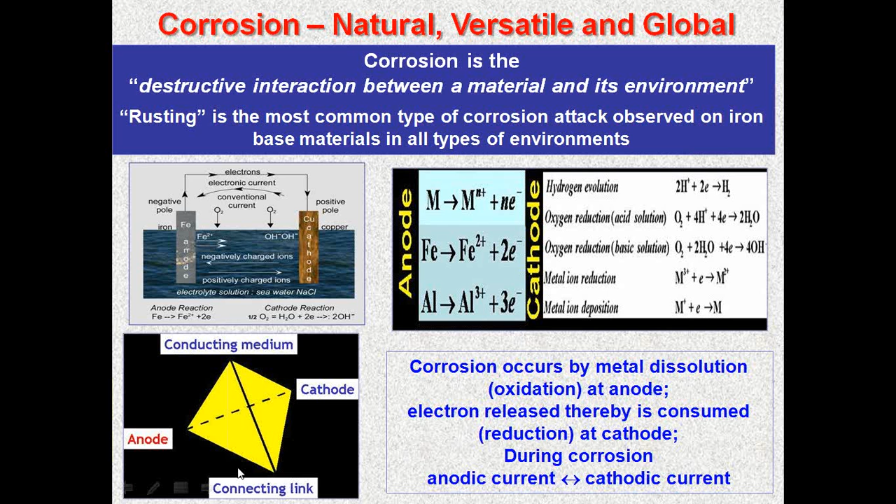The metals are produced from the ores available on Mother Earth. It's not that easy - we get the ore, mine them, extract them, melt them, and mix some metals together to make alloys, either as a metal or as an alloy. These are all made into engineering components by working with them, machining them, and welding them, making different types of components - tanks, pipes, flanges, so many things.

But during operation and service, corrosion is one of the damaging mechanisms, like fracture, fatigue, scaling. It makes the component reach its end of life, and it becomes waste. The economy is lost from where the ore started - the metal goes back into ore when it becomes waste. The energy we put in to extract the metal from the ore, make an alloy, make a component, and operate it is lost. The economics is lost, and we also generate wastage.

This is the natural corrosion cycle of material, because all metals are extracted from the ore, which is a natural stable compound. Take iron - the ore of iron is hematite and magnetite, nothing but iron oxides. From iron oxide, they practically take the iron out, somehow killing the oxygen. So the iron metal is always hungry for oxygen to again form the ore, that is iron oxide. It's a natural phenomenon - corrosion cannot be avoided in service.

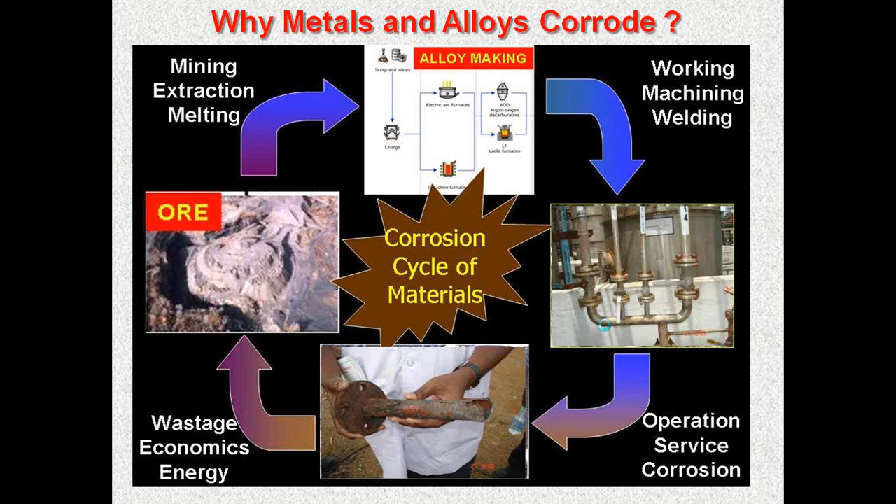Now our strategy is how to avoid this corrosion, or how to delay this corrosion, or how we can try to slowly stop the corrosion from happening, so that I have a lot of service life for the component in service. In this way, I am going to speak now the entire lecture about a class of material, stainless steels.

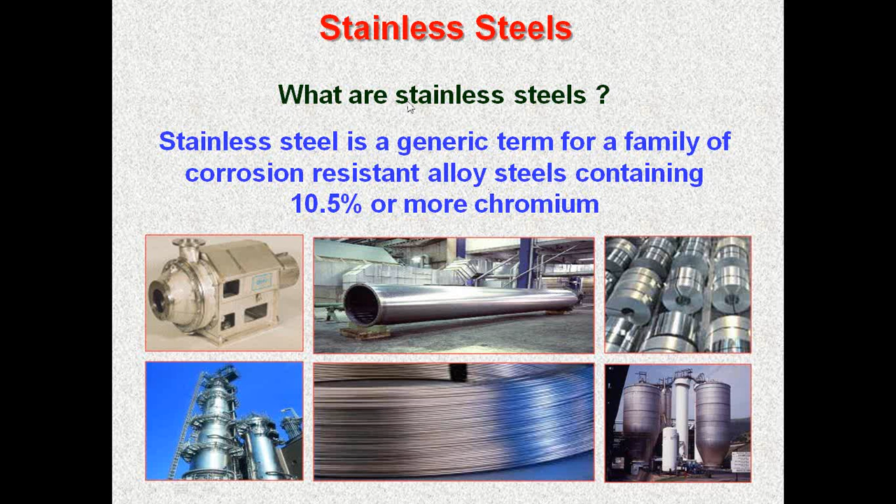What are stainless steels? A wonderful material having unique properties which made them used in various industries for corrosion resistant applications. They are basically a generic term for a family of corrosion resistant alloy steels containing 10.5% or more chromium. They are made as pumps, pipes, sheets, towers, wires, tanks - so many components are made using this family of alloy steels called stainless steels.

Who invented stainless steel? History says that Harry Brearley, a British metallurgist working at British Steel, around 1911 found that chromium above 10% can prevent the erosion and fouling of rifle barrels, which were used frequently in the war and had a problem of corrosion and fouling, erosion and fouling. This story just started between 1911 and 1913.

Not only this British metallurgist - there were also other scientists and engineers from other countries who similarly found that chromium, when added beyond some level, provides a kind of non-rusting behavior. That is how today we are celebrating 100 years of stainless steel. There are more than 150 types of stainless steel, with over 120 types used in the industry, and this year, 2011-12, we are celebrating 100 years of stainless steels.

However, the word 'stainless' was coined first by Ernest Stuart, a manager at a cutlery company, who first described stainless cutlery knives. This person, the manager of the cutlery company, was probably involved in supplying cutlery articles like knives and spoons, which were getting stained after being used for food. But probably he found one type of steel made with a little more chromium that was not having any stain formation, so he coined the word 'stainless.' That is how the stainless steel started.

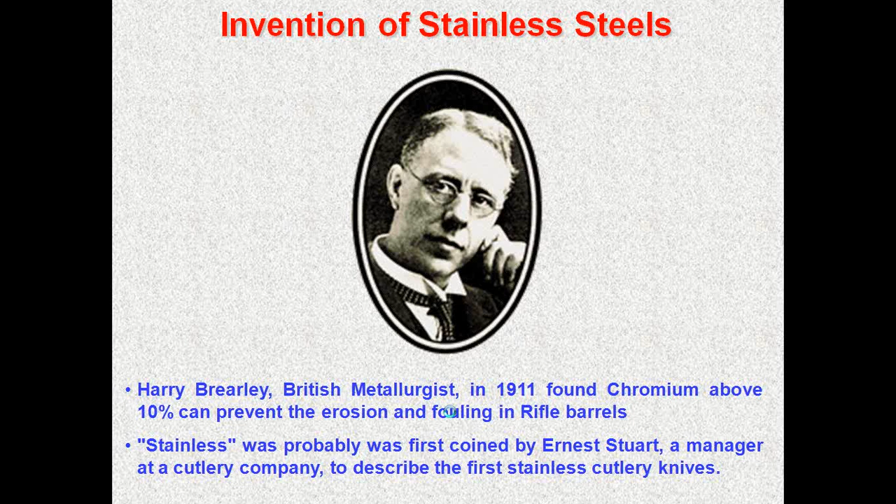If you want more details, let's look at the ferrous group of alloys - the iron alloys, alloy steels, and stainless steel. All of us know the family of steel, that's iron-carbon alloy, as carbon steels, alloy steels, and stainless steels. If you look at the iron alloys, from the meteorite or prehistoric iron to the Delhi iron pillar, which has stood erect for 1,600 years without much corrosion at Delhi, and then various other iron-carbon, phosphorus, sulfur, manganese alloys, then the iron-carbon steels.

From here, the situation improved to alloy steels, where people started adding chromium, tungsten, and were manipulating the chromium content to form an alloy steel with better properties than iron alloys. Very surprisingly, Michael Faraday also added chromium and found there were no corrosion issues, but he did not make it public; he also studied iron chromium alloys in his investigations.

Later you come to the stainless steel group. You can see Haynes, then Maurer and Strauss, Harry Brearley, Stuart, Borchers and Thomas, Guillet, and Goldschmidt. Many people started using various combinations of nickel and chromium, and they found that a minimum percentage of chromium, about 10.5%, is required to have this stainless property.

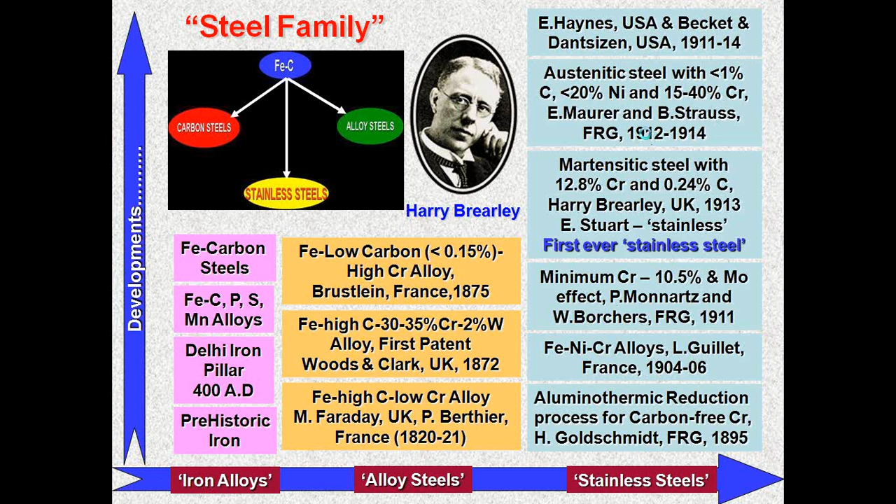This is the early development of stainless steel, but if you look at today, 2000s, from 1911, a lot of developments have happened. Today we have mastered the technology of stainless steel, producing from normal conventional stainless steel to highly alloyed, highly clean steels with tailored properties for various applications.

You can see nickel austenite structure, low carbon ferritic structure, duplex stainless steels, and more understanding of physical metallurgy, welding and other technologies. Then they found the problem of sensitization and intergranular corrosion. With respect to manufacturing technology, there's the AOD process, cleaner lower carbon and nitrogen containing steels, submerged arc welding, continuous casting, vacuum induction melting, electroslag remelting. Then also new varieties like superaustenitic stainless steel, high nitrogen stainless steels, life cycle costing, and highly alloyed stainless steels.

Today you have a lot of nanotechnology based developments, intelligent welding, pattern rolling, tailoring the surface. Many developments are happening. Stainless steel is growing and growing. We have more than 150 types of stainless steels in different classifications.

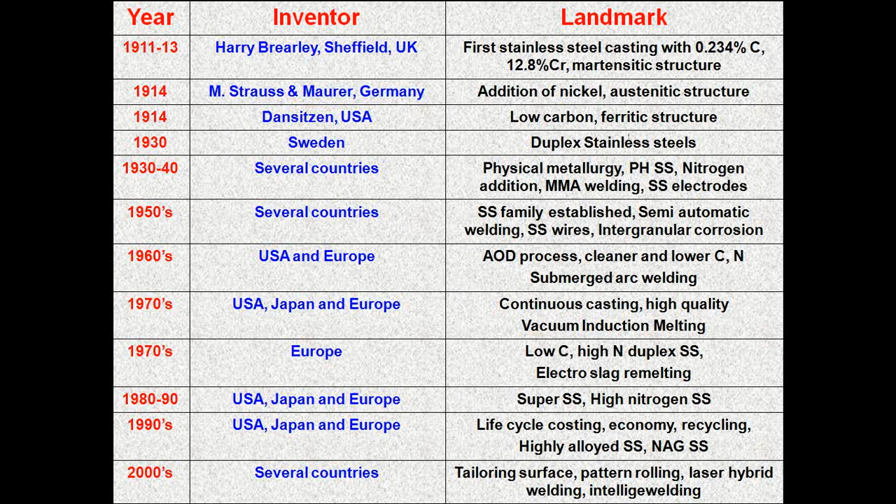A simple and fundamental question everybody has in mind is, why are stainless steels stainless? If you look at it, the formation of a non-rusting thin surface layer providing a stainless nature is the important concept giving stainless steel its stainless property. This passive film layer is made of chromium oxide, Cr2O3, and it forms when the chromium content is greater than 10.5% in the steel. This protectiveness, the stability of the passive film, can be enhanced by adding higher chromium content and also by addition of molybdenum, nickel and nitrogen.

What are the benefits from stainless steels? Corrosion resistance, high temperature properties, low temperature properties, hygiene and aesthetic appearance, ease of fabrication, toughness and impact resistance, and cost and life cycle cost. These are some of the best benefits that one can get from stainless steels.

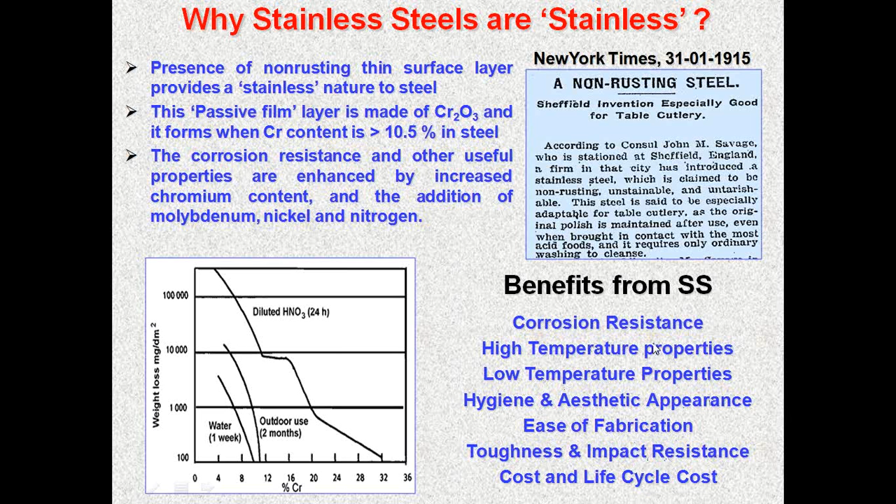This is a very important point. I feel this is one material where life cycle costing is very important. If you look at the life cycle of stainless steels, from the melt you can fabricate various components and use them in industry for various applications. Ultimately it doesn't just rust and get thrown away; it becomes scrap, and the scrap can be remelted. So by secondary melting and improving the quality, you can again use these stainless steels for further applications. It's as good as saying no scrap, 100% recyclable. That's the most important economical point.

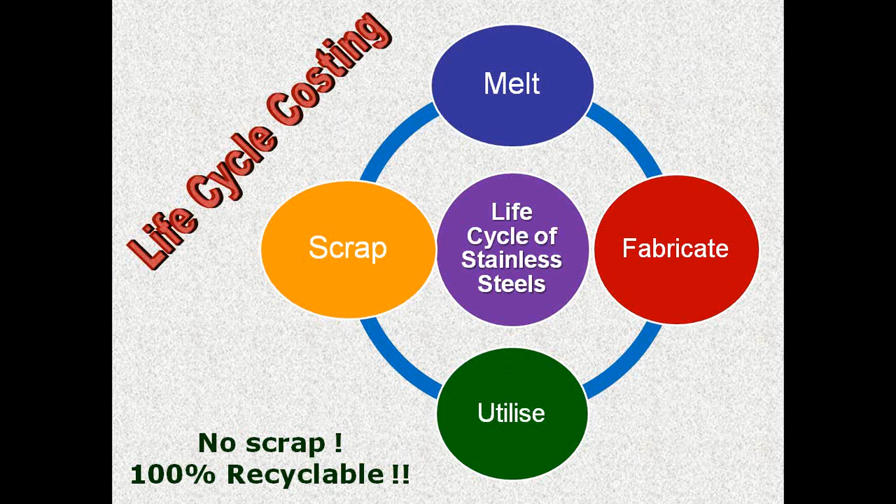How are they manufactured? Three simple steps. The first step is they are melted in an electric arc furnace. After fixing the charge, the amount of chromium, nickel, carbon and iron, it is melted in an electric arc furnace. You can also use scrap stainless steel directly as a starting material. The melting occurs around 1500 degrees, close to the melting point.

Then in step 2, this is transferred to a converter where the argon oxygen decarburization process is used to decrease the carbon by blowing out with oxygen, and then alloying elements are adjusted in order to match the composition. Then in the third step, the molten mass is poured into a mold, and then you make a billet or whatever cast structure or rod structure you want.

And also you can do a continuous casting by rolling them up to 2 meters wide and up to 300 millimeters thick. Then there's a suitable size for hot rolling, and this can be done after slab grinding.

This is a very simple step. Step 1, make the primary melt. Step 2, this should again be treated with an argon oxygen decarburization process to adjust carbon and other alloying elements. The third step is making it into a wrought product.

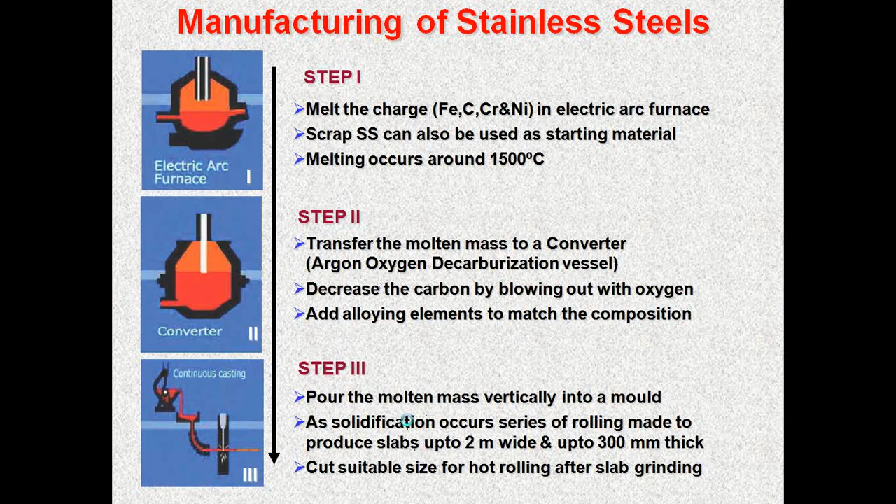Now this is a typical flow sheet that is followed in an industry like Jindal Stainless. They are the pioneers in stainless steel manufacturing in our country, where from the raw material stage, they go into arc melting, then the VOD converter, if the alloying elements or impurity elements need to be controlled precisely. Then they go to ladle refining, then either continuous casting or bloom casting.

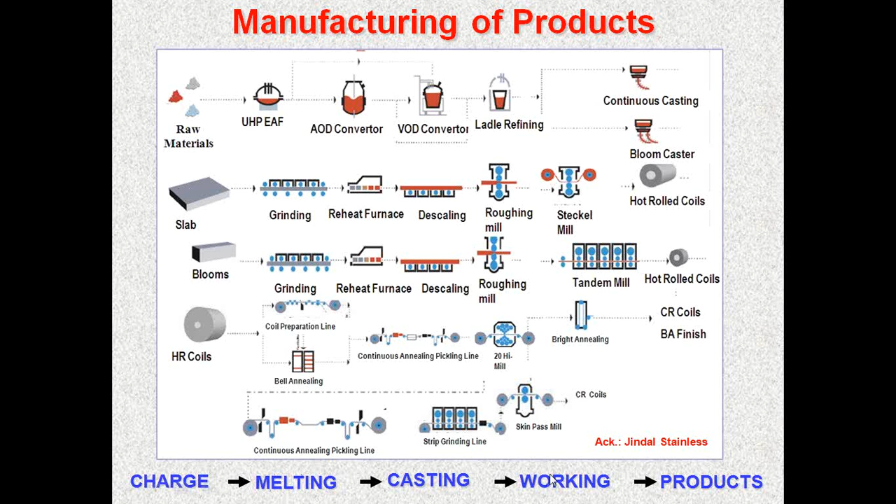So you get a slab or bloom or coils by continuous casting, then it is all treated, then sent to the users. So from charge, melting, casting, working, and then product - that's the flow sheet for manufacturing the product.

Now let us see a very simple fundamental to understand why there should be different classifications of stainless steels and so many types of stainless steels. Look at iron - iron is a wonderful element. It has an ability to change its crystal structure as you heat it.

You can see here this is the temperature and these are the 3 structures I've put here. This phenomenon is called allotropy. Allotropy is the ability to change its structure as you heat the element. Basically, iron is available at room temperature up to 910 degrees as alpha phase, which is body centered cubic, as you see here the structure.

Then you go to the gamma phase from 910 to about 1390 or so. You have the gamma phase which is FCC structure - this is called austenite, and this is called ferrite. Now you go to temperature 1390, near melting, you form a delta structure which is body centered cubic, and this is called the ferrite structure. This is the structure with carbon.

So if you are able to retain this structure, you have a ferrite structure. If you are able to retain this gamma structure, it is an austenite structure. This particular delta is formed during welding and other treatments.

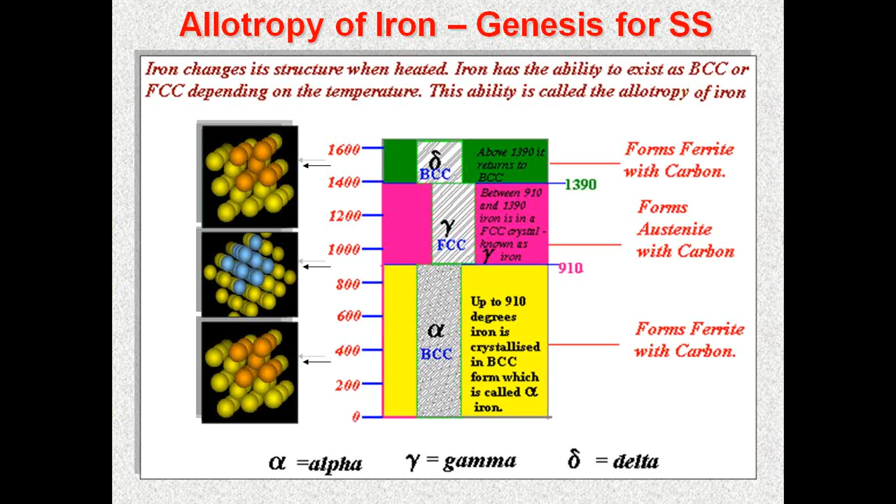Now, depending on the structure, you have a classification of stainless steels - it can be a ferritic stainless steel or austenitic stainless steel, and you also produce a martensitic stainless steel by transformation, diffusionless transformation. Now, I have given you a ternary picture of iron, chromium, and nickel. You can see here percentage of iron, percentage of nickel, and percentage of chromium.

And if you look commercially, there are about 5 different types of stainless steels available in the market. The austenitic stainless steels, predominantly 65 to 70%. The ferritic stainless steels, 20 to 25%. The martensitic stainless steels, about 7%. Precipitation hardening stainless steels, about 2%. And duplex stainless steels, about 1%. And if you take the number of types available, there are more than 150 types of stainless steels available.

You can have an austenite structure by manipulating the chromium, nickel, and stabilizing the austenite phase, or you can have a ferrite structure by controlling the carbon and reducing nickel to 0 and having more chromium - it's a ferritic stainless steel. Or you can have a martensitic stainless steel with moderate chromium, no nickel, and high carbon. So you can play with this iron, chromium, and nickel, and try to have a number of types, like 65 to 70% austenitic type, ferritic 20 to 25%, and martensitic about 7%.

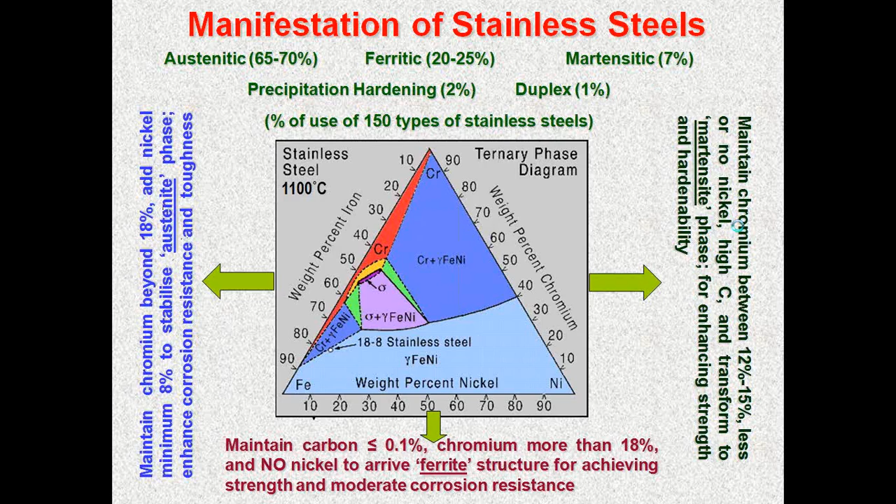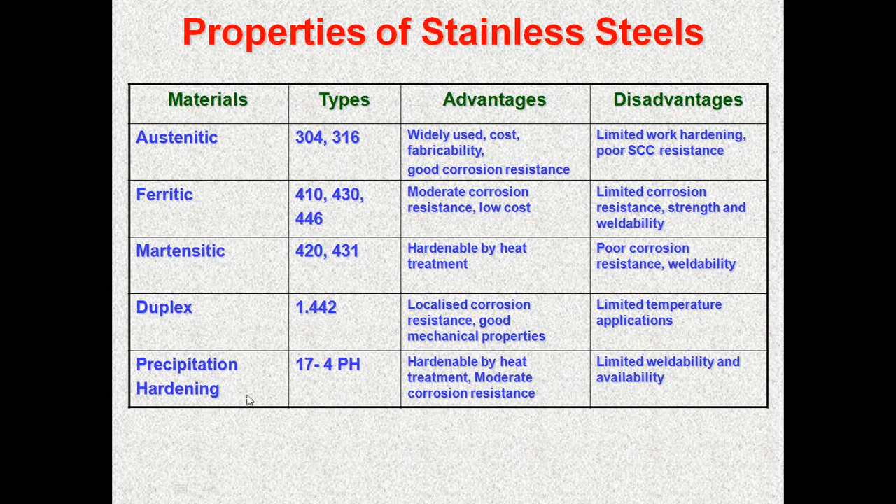Now, typically, I have given the classification of ASTM. 300 series are austenite, and 400 series are ferrite. Some of them are martensitic. Duplex are designated in a different way. Precipitation hardening - they all have their advantages and disadvantages, and depending on fabricability, corrosion resistance, hardenability, weldability, and mechanical property, one has to make a choice of austenitic, ferritic, martensitic, duplex, or precipitation hardening stainless steel based on the application you are looking for.

Now, coming to stainless steel, if you want to use stainless steel for any application, the following design parameters one should look into. In fact, I would recommend that for any type of stainless steel you want to use, the following parameters are very important. You can also refer to the ASTM standards, which will provide all this information.

The alloying elements that are present, particularly the impurity elements in minor quantities, their role is very important. Grain size, how fine or coarse it is. The thermomechanical treatment it has undergone either during manufacturing or fabrication, like percentage of cold work, type of cold work, extent of cold work, and thermal treatment. Also the stability of service conditions - temperature, load, creep and fatigue conditions, creep-fatigue interactions. The weldability of these stainless steels is very important for making any component. Then the life assessment strategies.

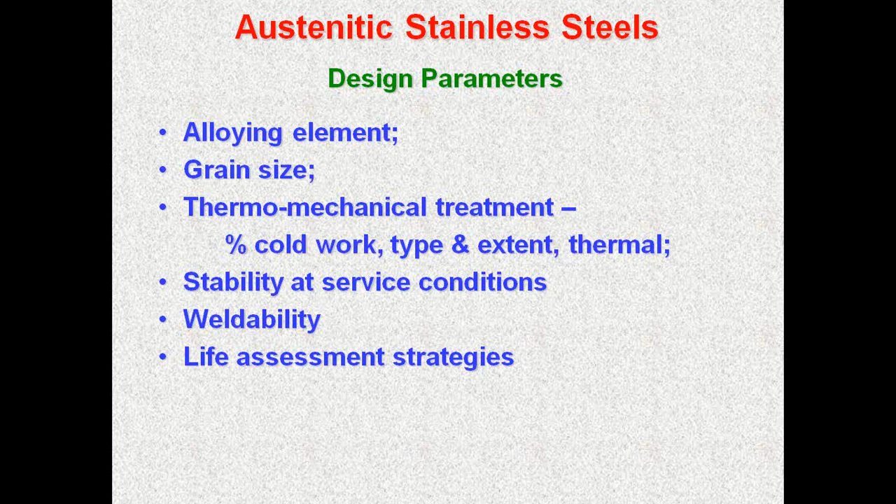If you look at the alloying elements, take the basic 304 stainless steel, popularly known as 18-8, that is 18 chromium 8 nickel stainless steel, which contains between 0.06 to 0.1% carbon. One can play with this composition to get various types. For example, if you reduce the carbon to eliminate the problem of sensitization and intergranular corrosion, you get 304L stainless steel. If you add about 2.5% molybdenum to this, it becomes 316 stainless steel, which has a lot of resistance for creep and pitting corrosion.

If you add very high chromium and nickel, maybe 18 to 25% chromium and 8 to 20% nickel, then it becomes 310 stainless steel for very high temperature applications with very good resistance for scaling.

And then you can also reduce nickel and add manganese and nitrogen - though there are two other series as well. I am here talking about 301 stainless steel, which is used for general applications. For the metro rail today, the body of the cabins are all made of this 301 stainless steel. Then you add titanium and niobium to avoid the problem of sensitization and intergranular corrosion - then it is called 321 stainless steel and 347 stainless steel.

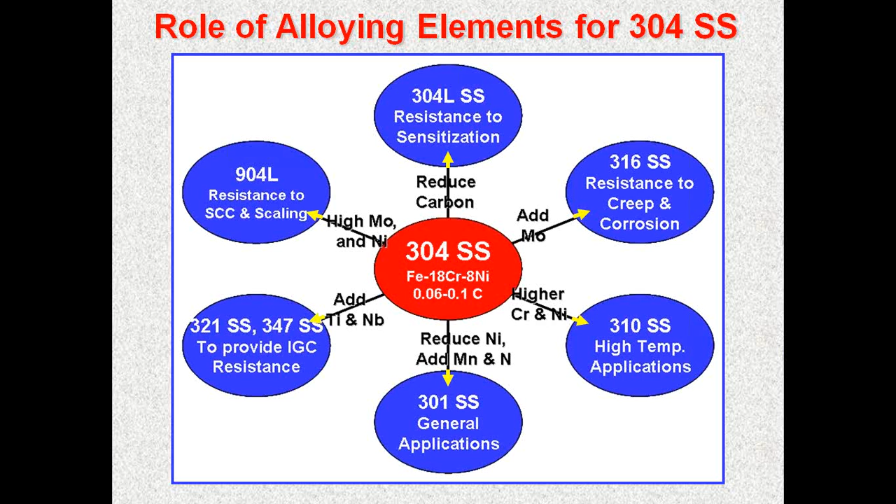Then you have high molybdenum and nickel, the 904L stainless steel, also called Superaustenitic stainless steel, which has very high resistance for stress corrosion cracking and scaling. So one can manipulate the composition to get various types of austenitic stainless steels.

What are the typical applications? High temperature applications with required strength, probably from cryogenic to 1000 degrees Celsius, a wide range of operating stress from 200 to 2000 megapascal, good corrosion and oxidation resistance from atmospheric to acidic conditions, and adaptability in multifaceted environments from food to aerospace. So it's a very versatile austenitic stainless steel. Based on the type of stainless steel, you can use it for various applications.

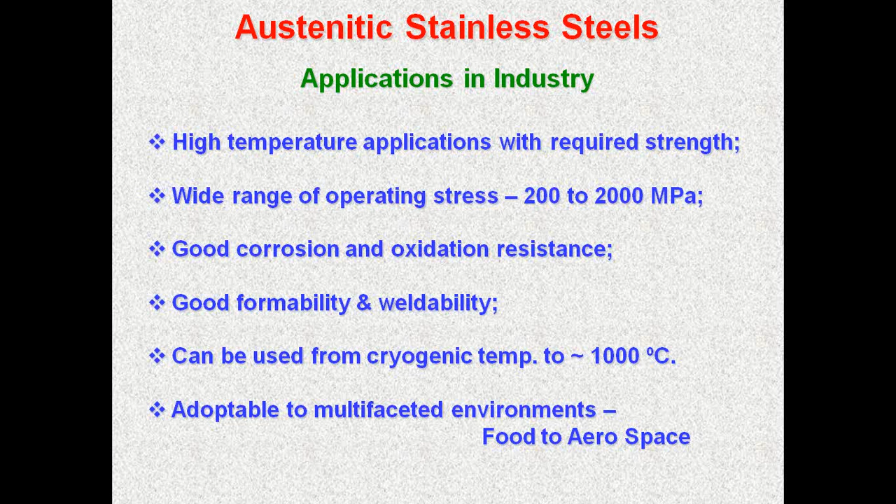Two important elements I am touching on here are nitrogen and carbon, which are present in steels and stainless steels. Both produce interstitial solid solution strengthening and both form compounds, but the difference is in the temperature. Beyond 450-500 degrees, carbides will form easily if carbon is more than 0.027%, roughly 0.03% - the solubility limit is very low. Whereas nitrogen has very high solubility and nitride formation is very sluggish, occurring above 750 degrees Celsius.

So nitrogen has an edge here with respect to precipitation, also enabling much higher temperature applications. Both improve corrosion resistance, strength, and creep and fatigue life in limited quantities, but higher strength and ductility from nitrogen is seen compared to carbon in steels and stainless steels. For every 0.01% of nitrogen added, you get an increase of 52 megapascal in yield strength for austenitic stainless steels. And both are economical - they produce large effects in small quantities.

By increasing a very small quantity - normally carbon is limited to 0.03% to avoid sensitization in stainless steels, but nitrogen can be added as high as 0.4 or 0.5%. One can very comfortably add up to 0.16% without any nitride formation, and it is very economical. It is not an expensive element, and it can replace nickel, which is very costly. Commercial alloys with different quantities of carbon and nitrogen are available in the market. This new class of nitrogenated materials is called high nitrogen steels and stainless steels.

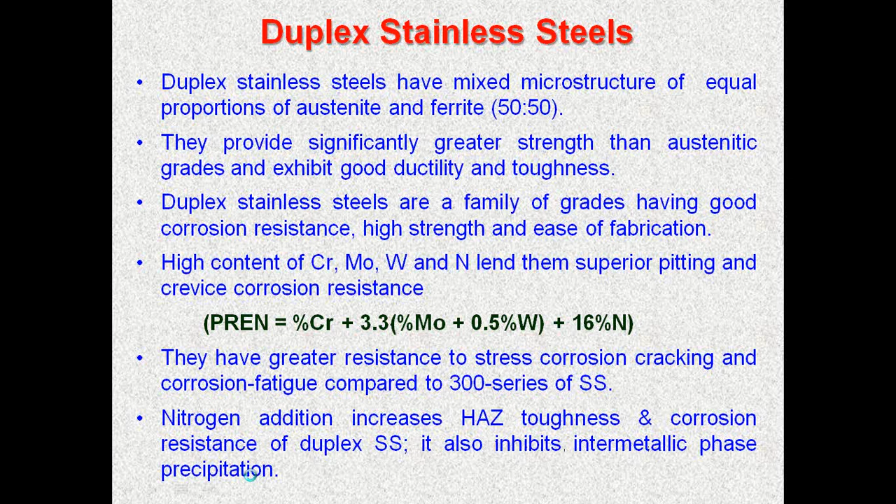The beauty of duplex stainless steel is that it is basically a primary ferrite solidification case. It goes through a ferrite-austenite zone where it gets approximately separated into 50% ferrite and 50% austenite below 1000 degrees when it is being cooled.

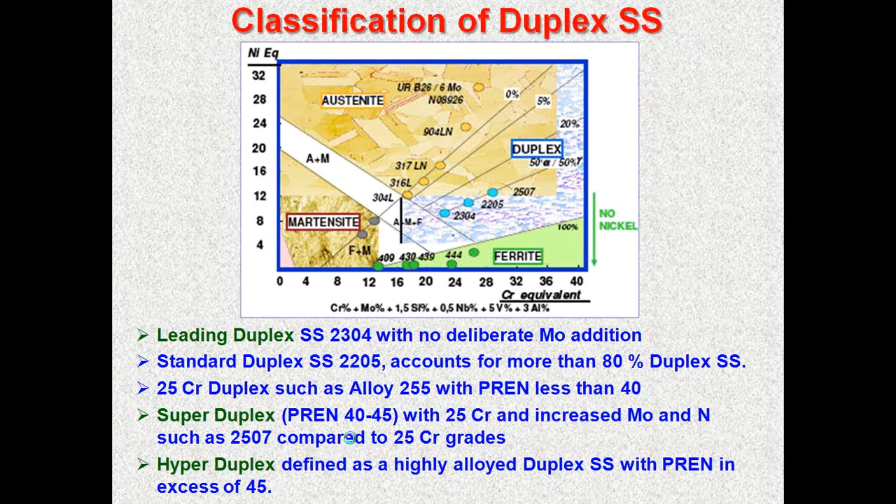To get this 50-50 balance, you have to control the chromium equivalent and nickel equivalent following the percentage ferrite diagram so that you get only 50%. It's typically a microstructure where ferrite is available as a darker phase, and the lighter one is the austenitic matrix.

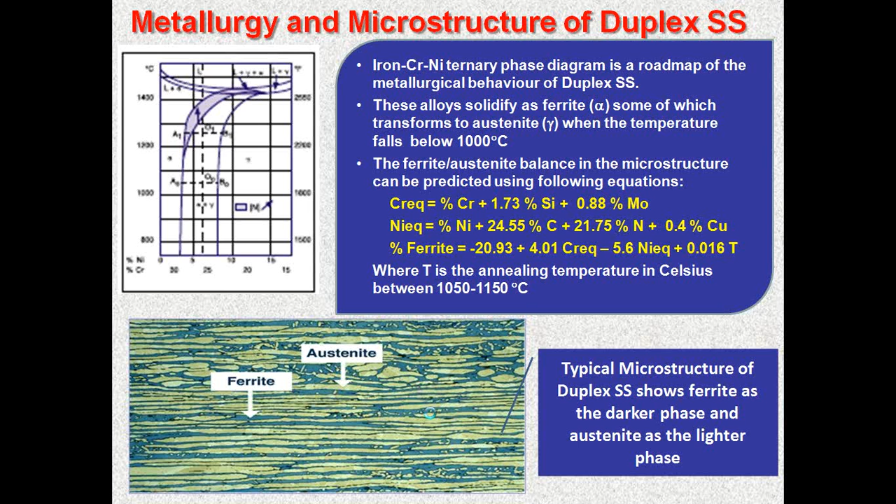Look at the typical composition here. You will always have very high chromium, the lowest being about 21 to 24, with less nickel, and molybdenum is also high. Nitrogen is added, minimum 0.1 up to 0.6%. In some cases copper is also added, and specifically the 2507 super duplex has tungsten also. All this additional tungsten, copper, and high nitrogen along with very high chromium provide excellent corrosion resistance.

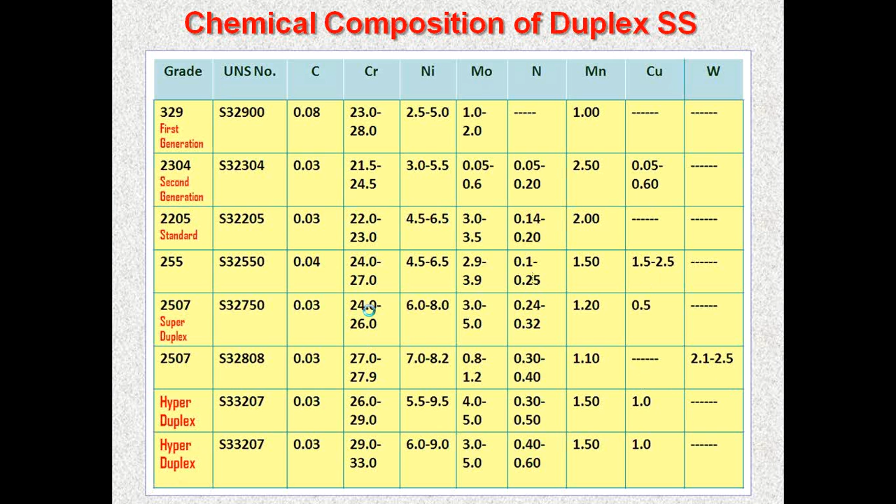But one of the problems of using duplex stainless steel is its tendency to form embrittling carbide, carbonitride, and sigma phases, and these kinds of phases affect their toughness and strength.

Particularly because the ferrite phase has a tendency to undergo 475-degree embrittlement, and the spinodal decomposition of the alpha phase microstructure that is present produces intermetallics like sigma, chi, and also some nitrides and carbides even at lower temperature, which will lead to a problem. When you have copper added to the alloy, this can also form an epsilon copper precipitate, and because of high nitrogen you will have chromium nitride precipitates. All these precipitates lead to some kind of embrittling behavior. So you have to be very cautious when using it for temperatures beyond 475 degrees Celsius.

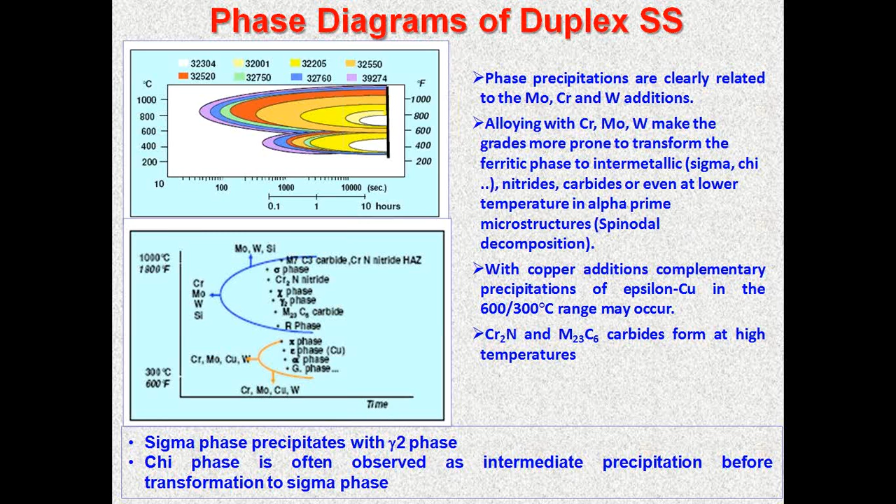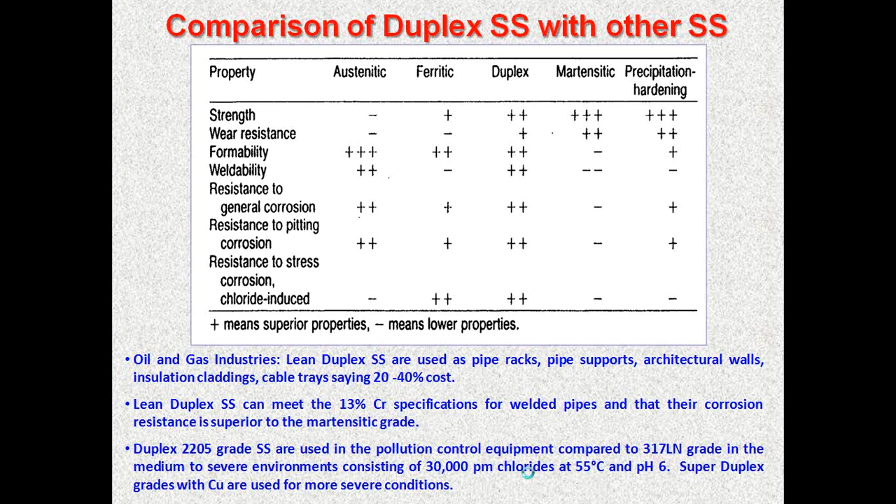That's how it is being used in oil and gas industries, and also for various other applications, particularly pollution control equipment, where a very severe environment consisting of even higher than 30,000 ppm chlorides exists, at temperatures up to 55 degrees Celsius and pH 6. It is also used in building and construction, for rebars, and for design and construction of decks and bridge component parts.

Pulp and paper industry is the most benefited one - all the digesters, pulp storage tanks, drums, bleaching equipment, where a very high chloride and sulfate combination is there. Lean duplex, the most common one, is used for liquor tanks and suction rolls in the paper mill. Urea plants use specific grades of duplex for the urea carbamate stripper and condenser. Most chemical processing, transport, and storage where high temperature and welding are not involved mostly use duplex as pipes and tubes, since there is not much welding or high temperature involved.

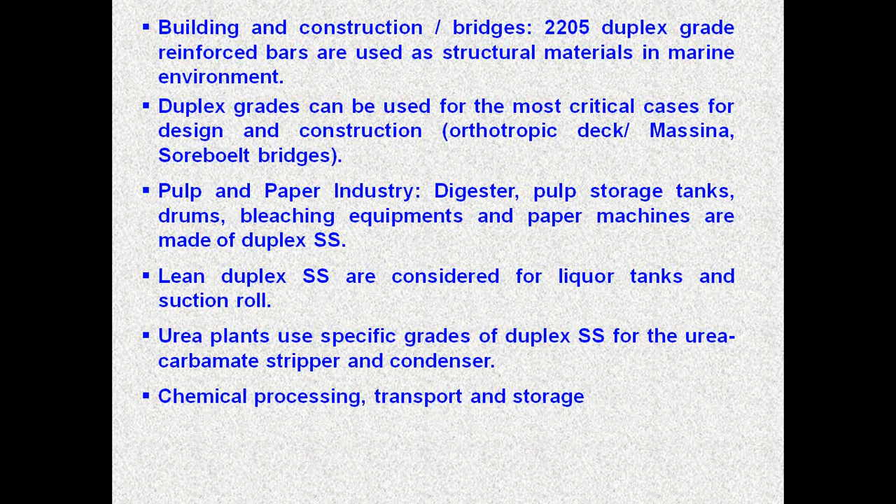The superaustenitic stainless steels are those containing more than 50% of non-ferrous elements, like chromium, nickel, and molybdenum added together - that is more than 50%, with the rest being only iron. They have the same structure as austenitic stainless steels, but as I mentioned, they have very high chromium, nickel, molybdenum, copper, nitrogen, and so on.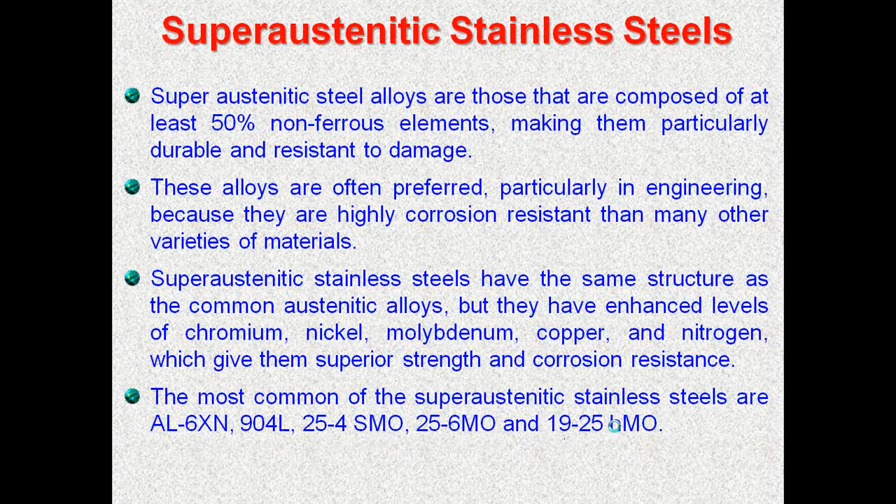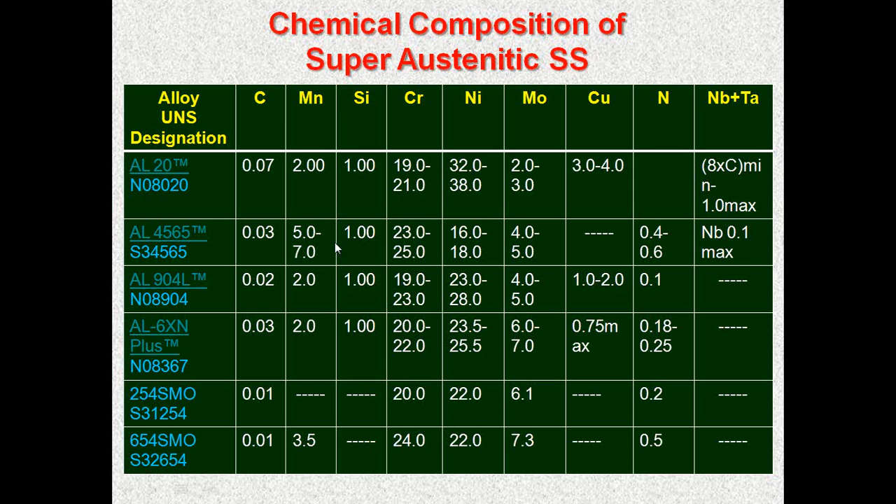The most common types are AL6XN, 904L, 25-4SMO, 25-6SMO, and 1925hMo. You can see their composition here - nickel is very high, chromium is also very high, molybdenum is present up to nearly 5-6% maximum, and copper is present in some alloys, along with nitrogen. This combination of very high alloying elements makes them super austenitic - a very stable and highly corrosion resistant variety for selective applications.

It has a typical austenitic structure, but they also have some kind of compositional banding, where partitioning of chromium and molybdenum takes place. Because of the high chromium and other alloying elements, it forms a tendency toward the sigma phase. You can see an austenite boundary with decorated sigma here, courtesy of the website - you will find this kind of work reported on the internet.

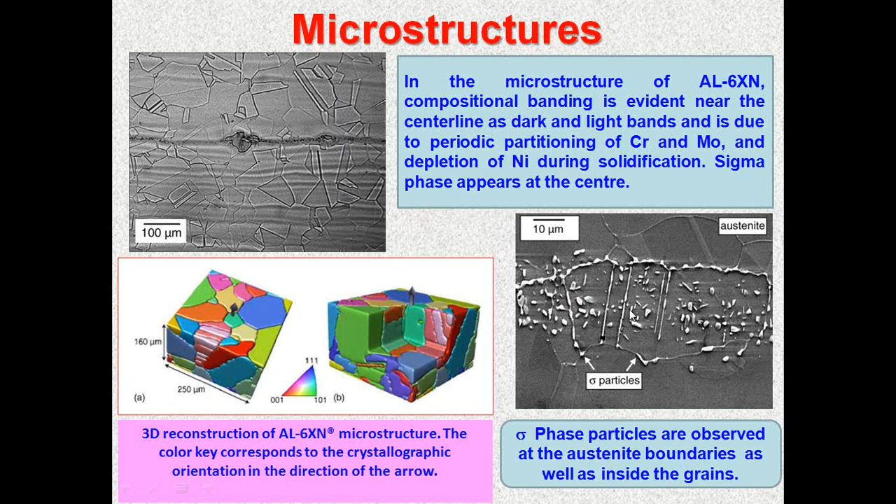It has very good applications, including corrosive food and beverage products, chemical, cosmetic, brewery, desalination, semiconductor, aerospace, biopharm, pulp and paper, and gas handling applications. But you must remember, as the higher alloying elements are there - chromium, nickel, molybdenum, copper, and nitrogen - the cost is also many times higher than a typical austenitic stainless steel.

It is rightly chosen for brackish water, seawater, pulp mill, bleach plants, and other high chloride process streams. It is definitely a cost-effective alternative to nickel-based alloys and titanium, because they are much superior in cost compared to Inconel and Hastelloy and Haynes alloys and many other varieties. The superaustenitic stainless steels are economical replacements.

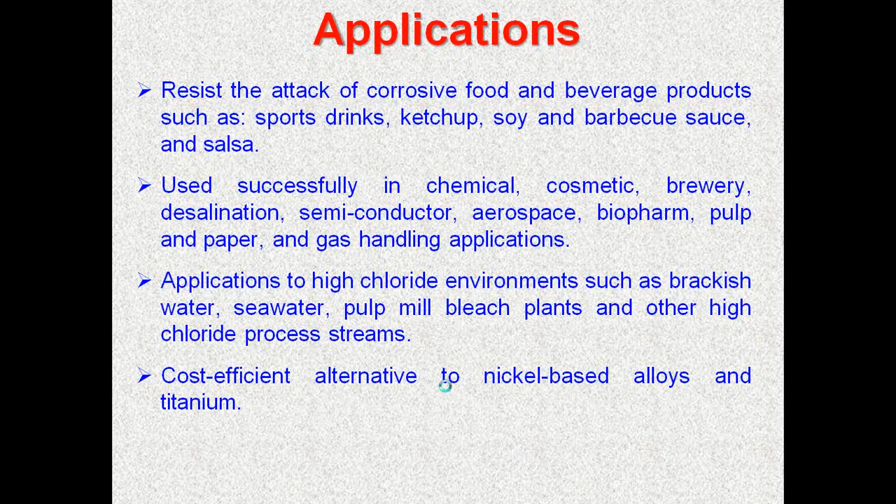Now we have seen all this austenitic, duplex, and superaustenitic. One important factor is, as I told you, why this stainless behavior occurs - it's because of the chromium oxide film that is present whenever the chromium content is beyond 10.5% in the steel. That is how we get this thin, adherent, self-healing chromium oxide film, which provides the protection, but they are attacked by halide ions.

Halide ions means a group of ions like chloride, bromide, fluoride, and iodide. These ions come to the surface and make attack at selective places where the passive film is weak, then they make corrosion attack selectively at these places, forming cavities called pits or pitting attack. This localized damage can lead to pitting, crevice corrosion, intergranular corrosion, stress corrosion cracking, corrosion fatigue, etc. So the application of stainless steel, whatever may be the type, when used in industrial conditions, all undergo this localized corrosion damage due to specific attack by halide ions like bromides, fluorides, and iodides.

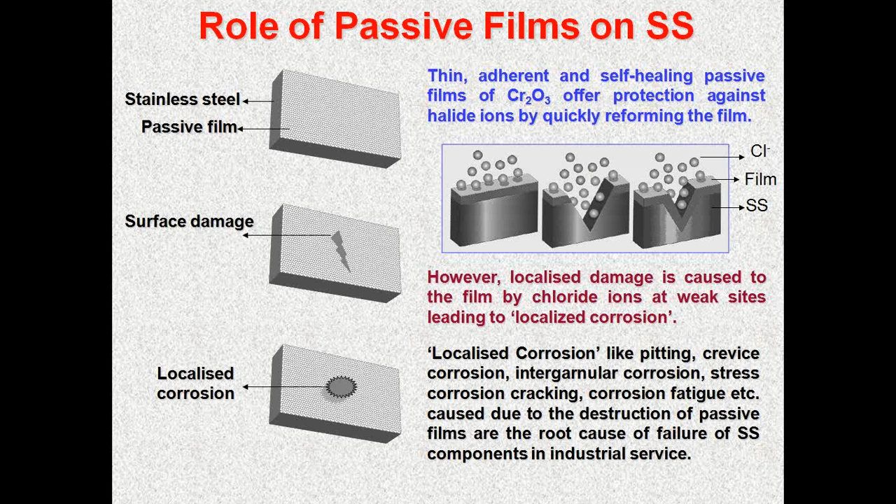In general, we have seen what corrosion is, but corrosion is not a single phenomenon. It's like we have some disease in our body - we are not well, not because of a particular disease. There can be different types of diseases. So materials also have corrosion, which is a disease, in different forms. Their corrosion manifests in different forms: uniform corrosion, pitting corrosion, crevice corrosion, intergranular corrosion, stress corrosion cracking, fretting corrosion, hydrogen embrittlement, corrosion fatigue, erosion corrosion, galvanic corrosion, high temperature corrosion, microbially influenced corrosion.

All these happen on the surface of material, and I have given a typical schematic picture of various types of corrosion. And all this happens because of the heterogeneities present on the surface. Every metal and alloy will have some heterogeneities starting from their grain boundaries, secondary precipitates, casting defects, weld defects, and also some stresses that are present, or precipitates, inclusions - whatever heterogeneity is present on the surface will always provide a site for corrosion to start.

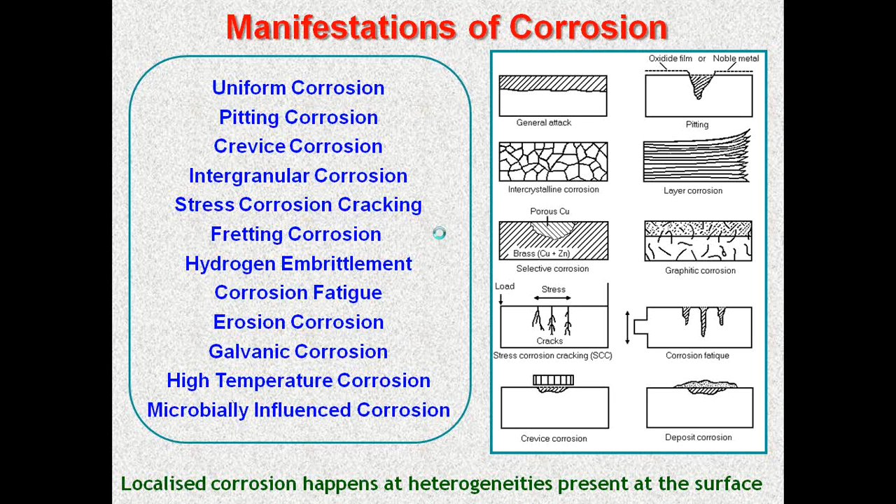I want to give a few important corrosion types of stainless steels. The most important is pitting corrosion, formation of a cavity or hole on the surface, which can be narrow and deep, elliptical, wide and shallow, or a subsurface attack. On the top surface you will never have a feeling of corrosion attack, but it may be a very bulky one at the bottom. The undercutting, horizontal and vertical - most of these pits are in sizes of micrometer and below, such that you will never know that it grows at the bottom of the metal surface into a very huge cavity, but on top you will see only a micrometer attack.

And when it goes beyond the required depth, it gives the site for corrosion cracks to start due to fatigue or mechanical fracture. This typically occurs when there is anodic dissolution selectively due to halide ions, as I told you. And since it is a small anode and there is a large cathode, it is also accelerated in nature, and there is an autocatalytic mechanism - once chloride enters this pit site, the pit is growing and continues to grow, and you will never be able to stop it, because the chloride that is getting collected in this pit will always give the possibility for the pit to grow.

So there are methods by modifying the alloying elements - add certain elements like molybdenum, nitrogen and nickel, which will slow down the pit growth. Or you can have some protective coatings on the surface which will avoid the pit from starting, or you can add inhibitors to the medium that will avoid the pitting, the chlorides and other pitting agents from attacking.

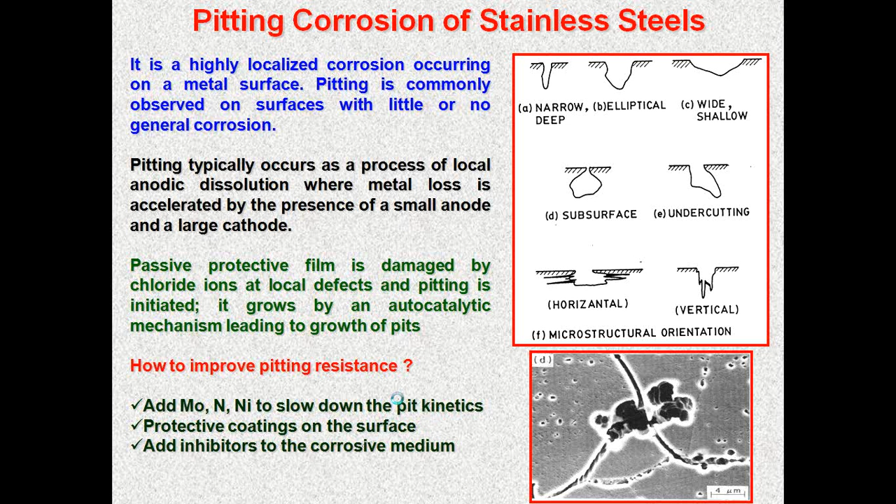The investigation found that when you have only chloride, such pitting attack will be very significant. The study showed that sometimes ordinary water was used to prepare the chemicals, and this ordinary water contained more chloride, which led to the pitting. Instead of DM water, which was not available for a short time, ordinary water was used, and that contained a large amount of chloride ion that led to the pitting attack.

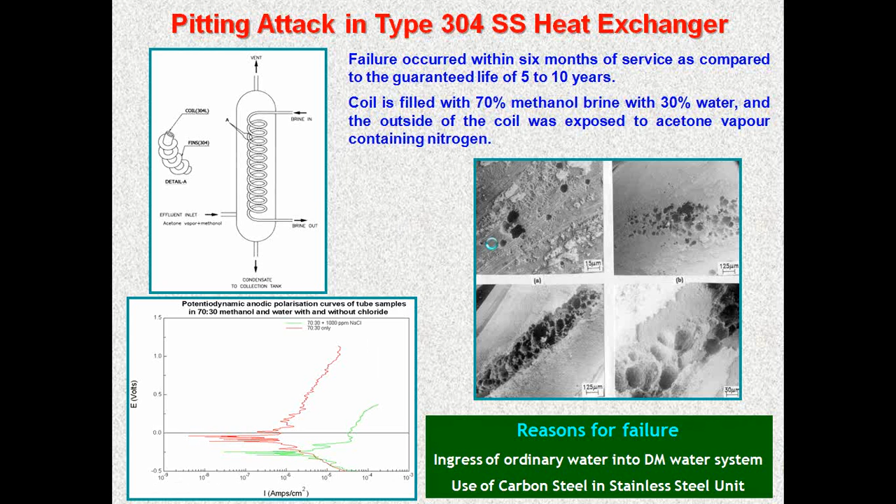Intergranular corrosion is another important type of corrosion of austenitic stainless steel, which happens in a sensitized structure. The grain boundary is selectively attacked, particularly in a welded component, in the heat affected zone very close to the weld area.

What is sensitization? During heating and cooling, normally stainless steel, which contains 18% chromium, forms chromium carbides along the grain boundary, which contain about 65% chromium. So the region very close to this grain boundary gets depleted in chromium, to less than 9%.

That means it takes away the passive film nature of the interface between the matrix and the carbide, which is very, very small in this line. So selective attack along this grain boundary takes place, leading to intergranular corrosion.

This phenomenon of forming a chromium depleted zone due to chromium carbide formation, whenever stainless steels are heated between the temperature range of 400 to 750, is called sensitization.

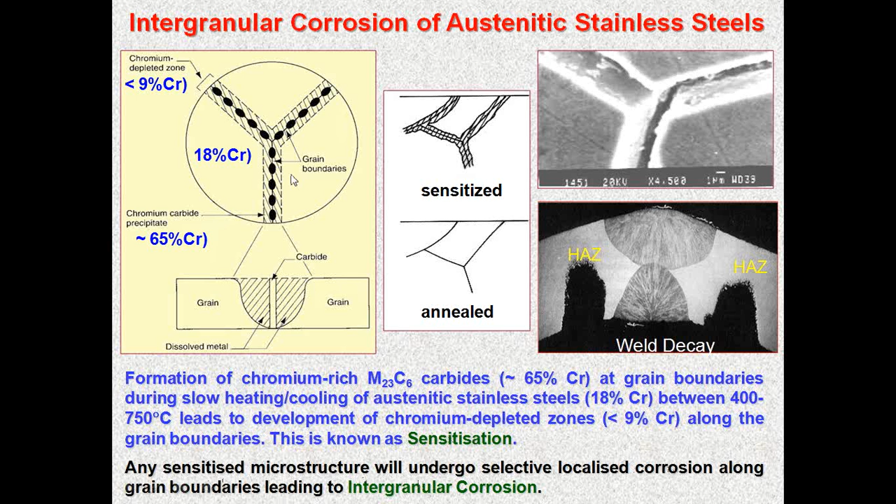Any sensitized microstructure will undergo selective localized corrosion like pitting or intergranular corrosion, and this is unavoidable in service whenever you are using austenitic stainless steels. This can happen either due to isothermal exposure from service temperature or stress relieving heat treatment, or due to continuous cooling during hot working, welding, or stress relieving heat treatment.

This heating and cooling between 400 to 750 is unavoidable during this kind of isothermal exposure and continuous cooling. So how do you avoid this sensitization?

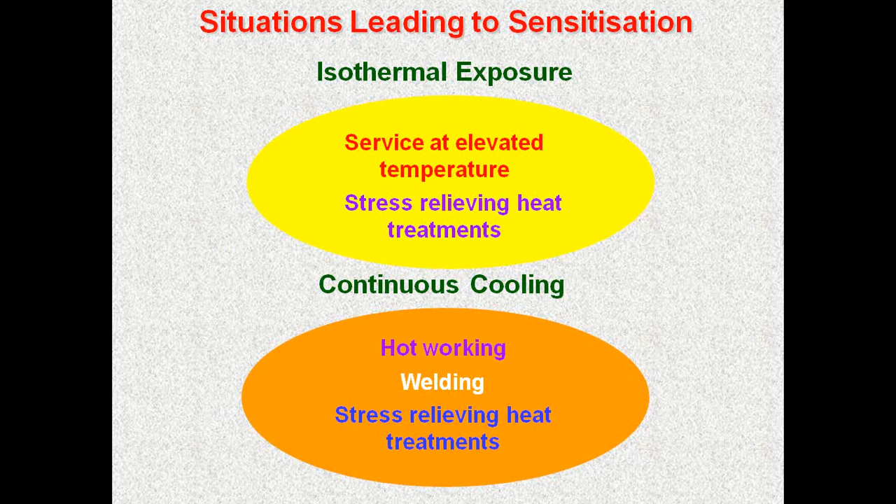You reduce the carbon content, because carbon forming carbide is the root cause of this problem. Reduce the carbon to less than 0.03%, and you can avoid carbide formation and the formation of the chromium depleted zone.

Or you can add titanium and niobium to stabilized stainless steels, which are called 347 and 321, which will stabilize as titanium and niobium carbide and will not allow chromium carbide to form and the subsequent chromium depleted zone.

Another option is that after you have done the welding or heat treatment, you have an apprehension that chromium carbide would have formed and a sensitized structure is there. Then you can heat it to a higher temperature, around 1050 to 1100 degrees, and water quench rapidly. Then you will find that the carbides are redissolved as carbon and chromium, and you avoid sensitization.

Additionally, one of the options is to add nitrogen to prevent the formation of carbide, and it will not create a sensitization problem. Nitrogen up to 0.16%.

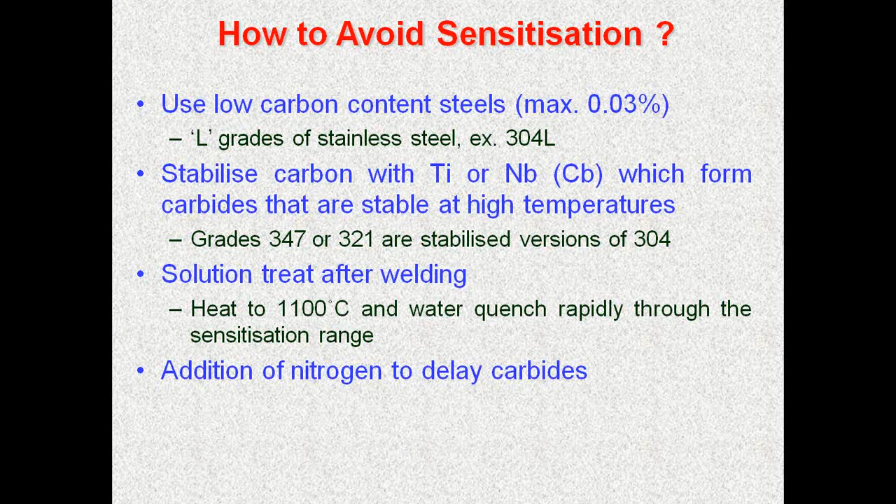Crevice corrosion is whenever there is a metal to metal joint, or metal to non-metal joint, the joint undergoes selective corrosion attack. It happens due to the chloride level, and this is mainly because there is a selective depletion of oxygen here, and also the concentration of chloride is different here.

Chloride diffuses, and selective corrosion takes place between a metal and non-metal, like a gasket, or between two metals. So where there is a restriction of space, say in a micrometer square area, where diffusion of ionic species is not possible, concentration of ions like chloride or depletion of oxygen leads to crevice corrosion.

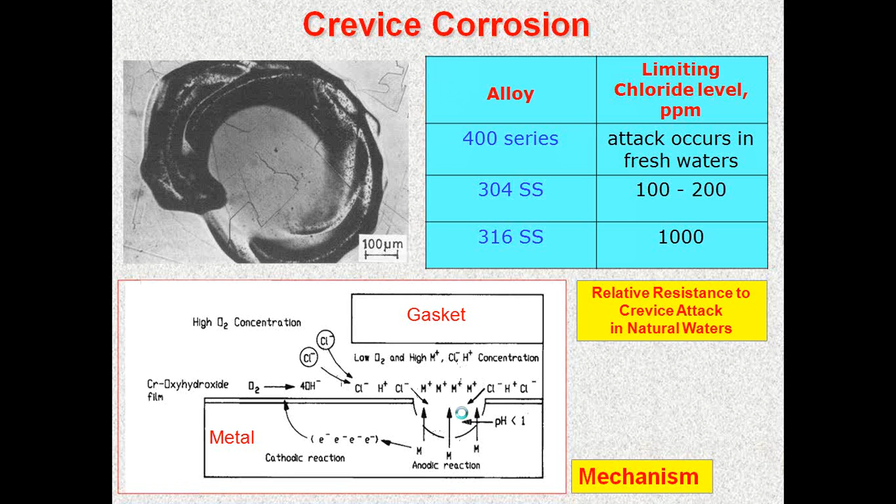It may appear like a very small type of corrosion, but you see such a huge heat exchanger used as a carbamate heat exchanger in a fertilizer industry. The tube to tube sheet joint had some poor tube to tube expansion, and there was a gap of a few microns here.

This gap led to severe corrosion, and you can see that there was leaking, and within a short period this brand new, imported heat exchanger got into a problem mainly because of the crevice corrosion that took place between the tube and tube sheet.

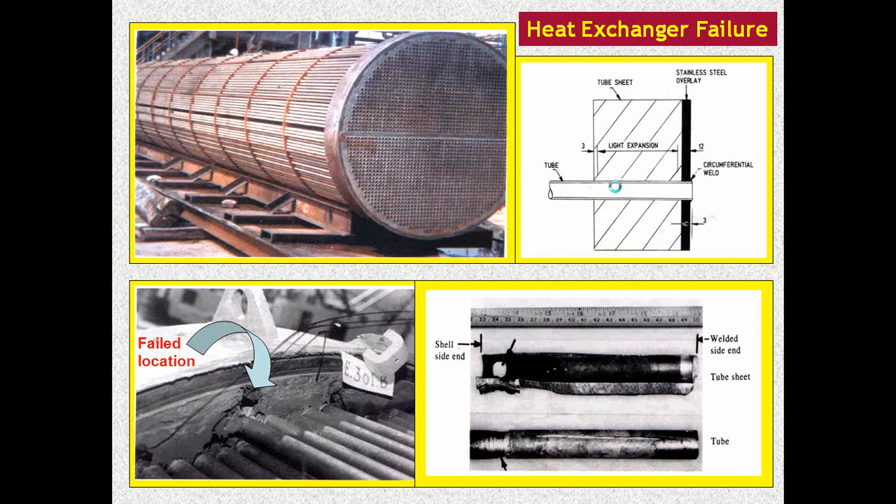Stress corrosion cracking is another major type of corrosion, which is mainly due to the combination of tensile stress and a particular specific environment. It is a combination of tensile stress under specific environment, like a material such as stainless steel, which is susceptible to stress corrosion, and it undergoes stress corrosion cracking.

There are different combinations: high strength steel with hydrogen and hydrogen sulfide; mild steel with hydroxide, nitrate and carbonate; and austenitic stainless steel with chloride, hydroxide and high temperature water.

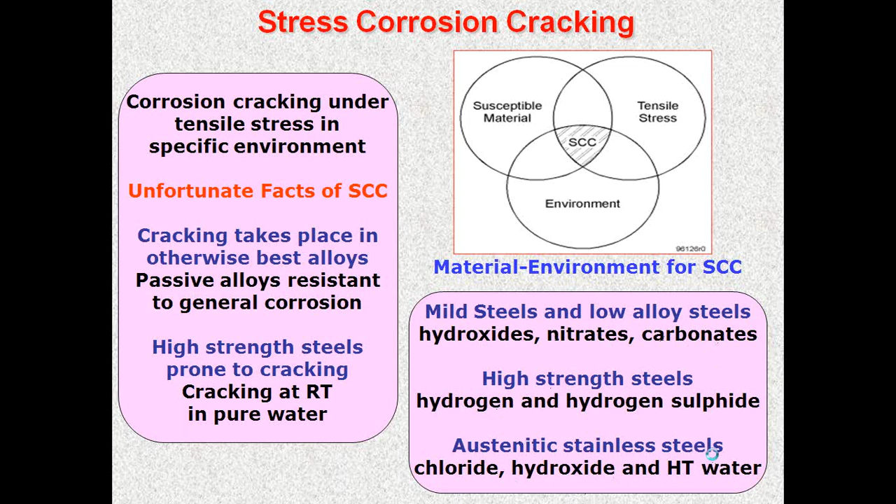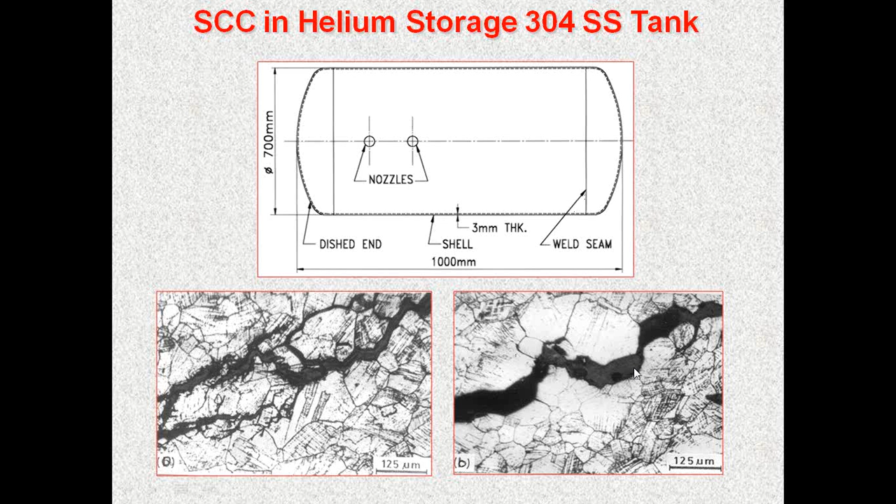Unfortunately, they used normal water and not DM water, which contained a lot of chloride. Because this weld had not undergone any stress relieving, the residual stress produced after welding, plus the chloride present in the water left out after the hydro test, led to stress corrosion cracking. This is a very important type of corrosion, and the entire tank had to be discarded.

Microbiological corrosion is one of the most important corrosions felt by industry today. All aquatic environments have microorganisms and macroorganisms that have a tendency to attach to any metal surface to get nutrients. They release excretions that form exopolymer, which attracts further microorganisms. They form a colony or biofilm, and finally a deposit forms, leading to corrosion underneath. There are also certain bacteria that can eat the metal by reducing sulfate, called sulfate reducing bacteria. All these attacks due to micro and macroorganisms are a common problem in industrial processes, due to the presence of these organisms and nutrients on metal surfaces in the aquatic environment.

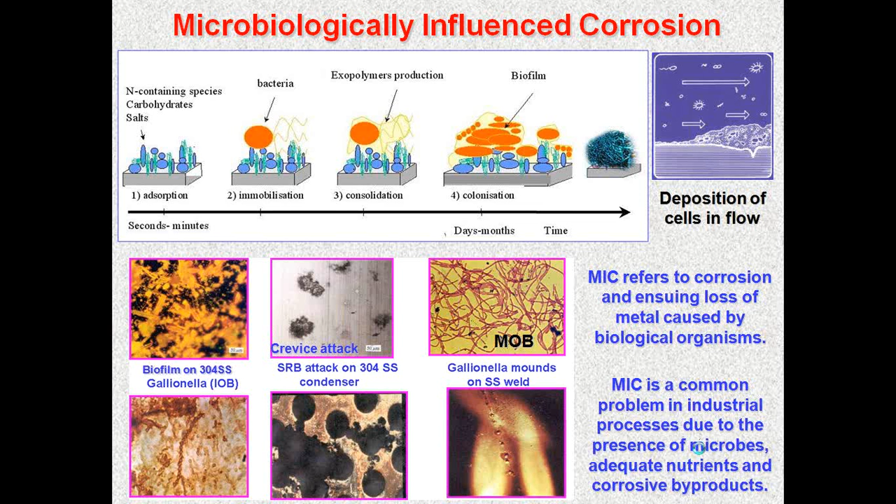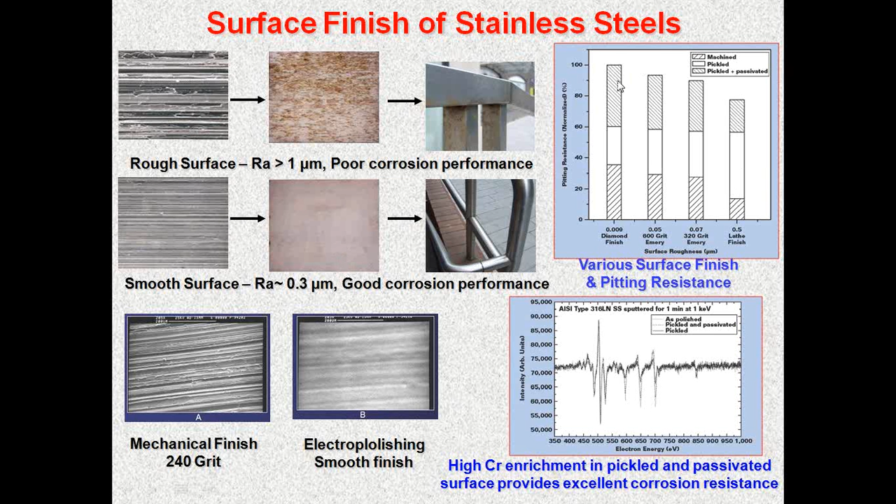Now coming to the surface finish aspect: normally a smooth, fine, or electropolished surface is very good for avoiding corrosion problems, while a rougher, coarser surface will attract condensation of moisture, leading to more surface attack. So a better, finer surface finish gives better corrosion resistance in service.

If you want to handle and properly use stainless steels, you have to be careful of certain points. You have to avoid embedding surfaces with carbon steel. Normally people manufacture stainless steel components in a workshop where carbon steel is also fabricated, and they don't realize this. Carbon steel is a very hard component which gets embedded on the soft matrix of stainless steel, causing local rust spots, and scraping with steel tools or surfaces also causes such things.

Grinding debris attached to the surface has to be removed by pickling treatment. This is very important, and after that you have to also test for removal of iron by the ferroxyl test, or ensure that with pickling and passivation such contamination is removed. Sometimes even the heat tint present after welding should be removed by pickling, and surface contaminants like slag, dirt, paint, chalk marks, and pencil marks should all be removed when handling finished stainless steel components for any application.

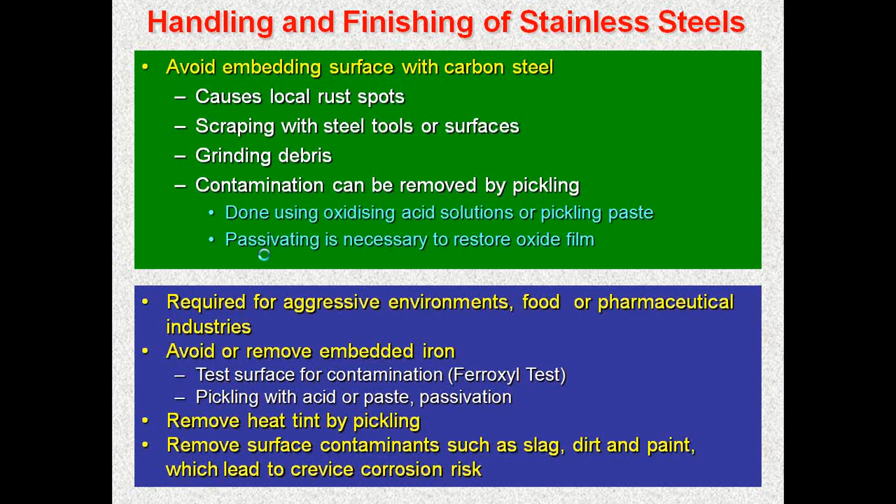Pickling and passivation are well known to all of you: pickling is a descaling process using a chemical like acid, and passivation is a treatment to artificially form an oxide film on the surface, particularly done with a mild oxidizer like 10 or 20% nitric acid. There is an ASTM process for this, and it should never end with only pickling - you should always follow with passivation. Every component, when it arrives at your industry, you have to ensure with your fabricator that the final step is pickling and passivation. Before you put the component into final use, you must ensure they are always pickled and passivated.

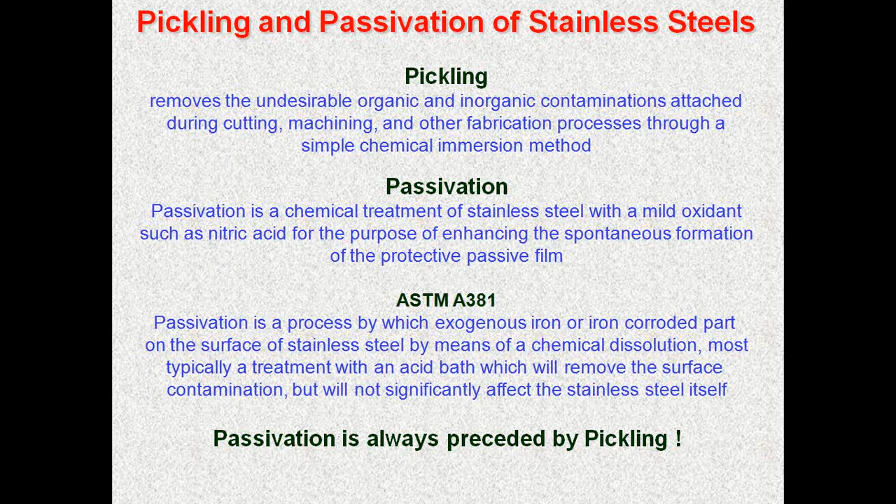Welding is another important problem. It is an indispensable tool - without joining, you cannot make a component. TIG welding is commonly used. If you take a typical boiler made of stainless steel, or a kind of nuclear reactor primary vessel, there will be tens of thousands of weld joints made by TIG welding. Because welding is done in an open atmosphere, though the weld torch is shielded with argon, the melting and cooling under uncontrolled conditions leads to heterogeneities in the structure. There will be a heat affected zone due to thermal cycling from multi-pass welding, and the weld structure will also be very composite in nature.

There are two issues with respect to austenitic stainless steel welding: one is hot cracking due to impurity elements present, and the other is sensitization in the heat affected zone, which we have already discussed. So one has to take a lot of care to avoid these two issues - hot cracking by controlling the heat input and by controlling the chemical composition of the base metal as well as the filler wire or welding electrode, and sensitization also by controlling the other parameters.

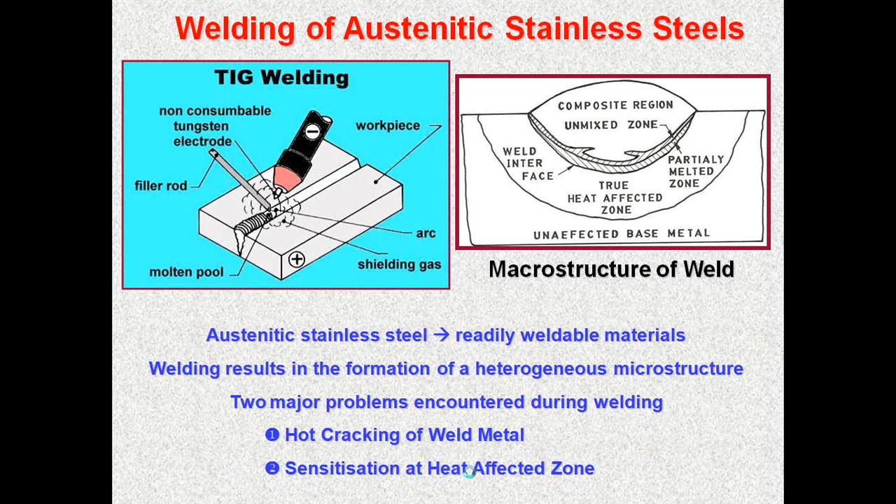Many times, as I told in the beginning, people think that stainless steel is a divine material, that they can do anything with it. But there are many misuses and abuses of stainless steel.

You can see that nuts, bolts, blinds and flanges, etc., newly fabricated stainless steel items, are generally left open in the atmosphere without much preservation. But people think stainless steel can easily withstand corrosion and work even without any preservation.

Storing stainless steel components along with rusted and used carbon steel in an equipment storage yard is very commonly seen in industry. You should not do that; you have to separate them. Stacking stainless steel pipelines along with carbon steel is also very dangerous.

Improper insulation and not closing it after subsequent repairs and inspection is also very important. If you have an insulated component used for high temperature or other applications, whenever you do repair or inspection, you should close it properly so that the place is not vulnerable for chloride or other aggressive ions to enter and start localized corrosion.

Improper fitting of galvanized iron and MS nuts, bolts and flanges with stainless steel provides a galvanic effect. For strength or economic reasons, people use galvanized iron or mild steel nuts and bolts for stainless steel pipelines. That's very, very dangerous. This is mainly because technical knowledge is lacking, and it's necessary to avoid such misuse and abuse of stainless steel in industry.

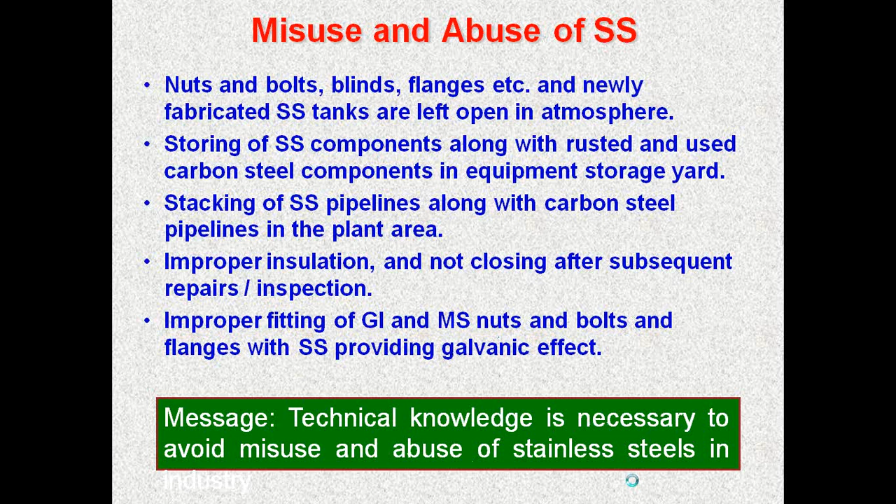I'll give an example of a stainless steel component kept under storage for over 20 years, because management wanted to keep it for further use as a replacement or emergency requirement in a plant. But the plant was in a coastal atmosphere with regular salt condensation. Though it was kept in a structure, it was not preserved at all.

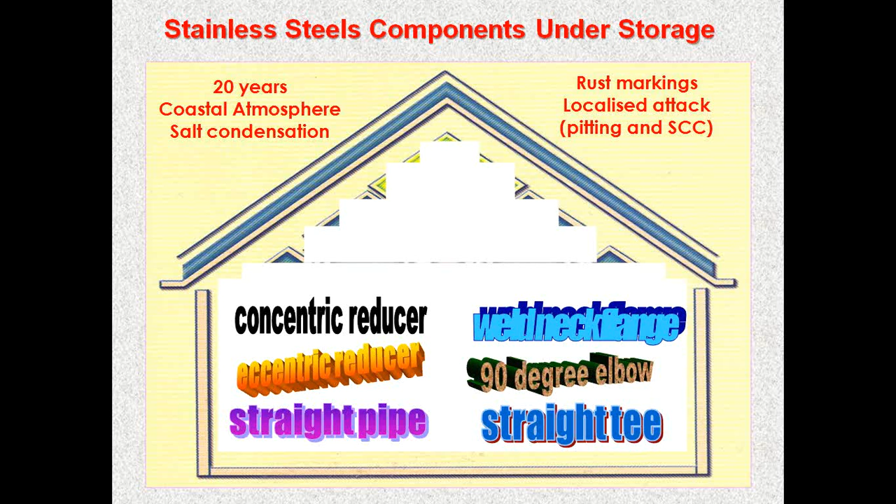When we opened it up to see the condition of the stainless steel components in this storage place, we were surprised and amazed to see pipes with stress corrosion cracks. You could see the straight tee, eccentric reducer and weld neck flange, all rusted. No one would believe it was stainless steel; it looked almost like alloy steel or carbon steel.

That was mainly because they were never preserved. Prolonged storage with less inspection and maintenance resulted in rusting of the stainless steel. It's very unusual, but chloride content in a coastal atmosphere is very high.

Condensation of such chloride over the stainless steel surface combined with dirt led to rusting and localized corrosion. Deficiency in storage, unsafe stacking, mixing of steel and stainless steel components, and poor humidity, air circulation, temperature and cleanliness are the root causes of the failure.

Absence of surface treatment of the finished component was another factor. Some surface components, after being finished, were not pickled or passivated; they were kept in the as-fabricated condition. That was one of the reasons.

Pipes were also stored without any plastic inserts. Normally both ends of the pipes should be closed with a plastic insert so that moisture doesn't enter and condense, or rainwater doesn't get in and start a corrosion problem. The main problem was pitting and stress corrosion, mainly due to poor storage conditions.

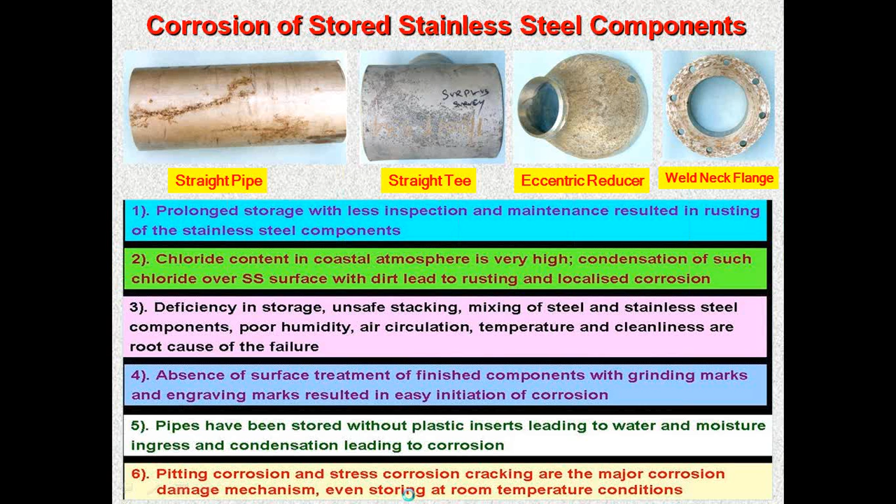How do you then avoid this? Please take care that residual stresses introduced during fabrication, and sensitization occurring with high heat input welding, are relieved and annealed prior to storing. This is very important.

If you want to identify the component, scribing is preferred in place of engraving. Water shall be completely drained after a hydro test. Contact with finished parts shall be made using hand gloves only, if it is a very finely finished item, or for pharmaceutical, food, beverage and maybe nuclear applications.

Always pickle and passivate fabricated parts prior to storing or commissioning. Check for corrosion damage by dye penetrant test. If it's stored for a longer time, you should check for corrosion attack.

You have to use DM water with less than 50 ppm chloride for this purpose, for dye penetrant testing, hydro testing, and for preparing degreasing, pickling and passivating solutions. Store stainless steel parts separately; iron-contaminated stainless steel should be avoided.

The storage area should be maintained properly, and you should check the quality of sealing once every 6 months.

But still, I find a lot of inadequate and improper maintenance has led to a lot of corrosion, which is the cancer of your machine. And this is the major problem we see in industry.

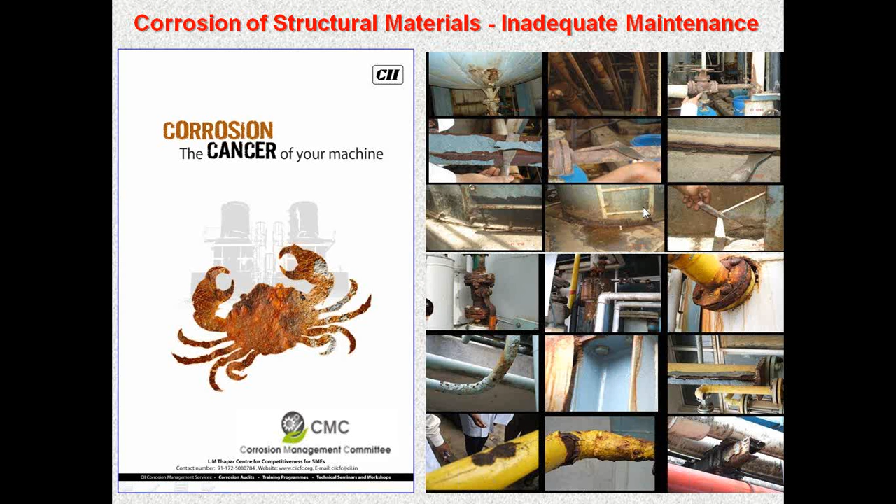That poor knowledge and poor awareness of using that. There are a lot of precautions I am listing out. You can go through leisurely, but I will simply quickly run through because we are running short of time now.

During transport, all sheets and pipes need to be wrapped in polythene sheets along with silica gel. And when stacking for easy handling, plastic pipes should be separated by wooden spacers or so, to avoid normally observed deep scratch marks. Ensure that all specifications are adhered to at the time of acceptance of the material.

Plasma cutting: after plasma cutting, heat affected zones should be ground or machined to remove unwanted microstructure. Shear cutting of solution annealed plates will introduce residual stresses. Such plates should be protected during long storage.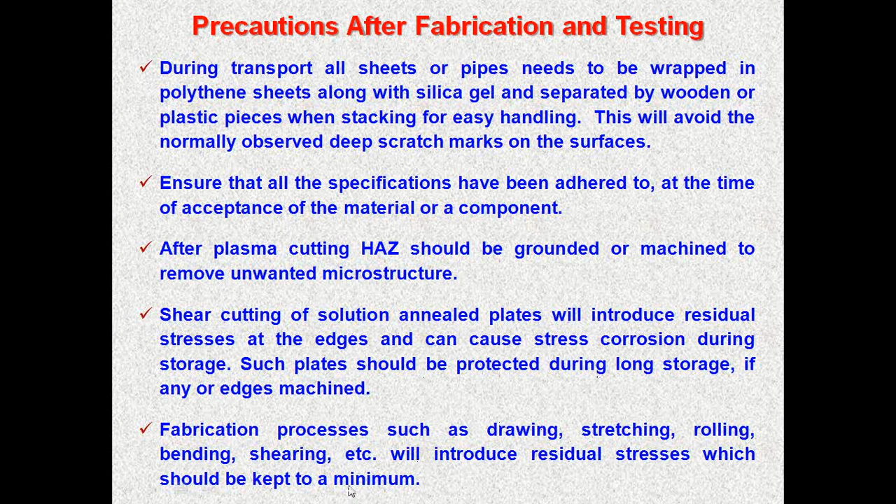Fabrication such as drawing, stretching, rolling, bending, shearing, etc. will introduce residual stresses. These should be kept to a minimum. Force fits during welding shall be avoided. Weld spatter and fumes from coated electrodes can leave fluorides or chlorides, which should be avoided.

Dark heat tint present on the welded surface is an unprotective oxide film. This should be removed by pickling and passivation. Including bird droppings and lubricant oils, these should be cleaned with DM water.

Even human sweat contains chloride, so I recommend using gloves instead of naked hands to deal with finished components. Pickling and passivation is a must, and after passivation you have to ensure that scales are removed. Finally, the components should be dried up totally.

Stamping should not be encouraged by any stamping process. Scribing is better, as stamping will introduce a lot of local residual stresses.

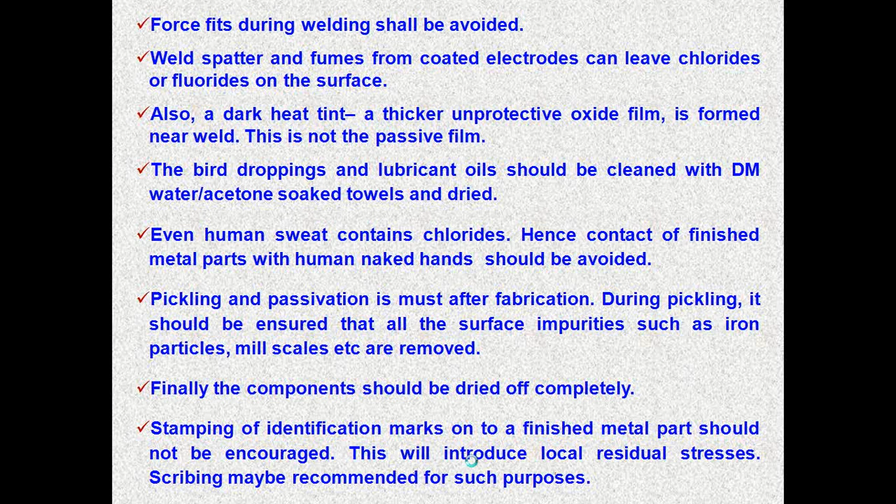I give you a lot of references, which you can go through. These are wonderful sites for additional reading to enhance your knowledge. I tried my best in this one hour to give whatever information can be an eye opener for you about stainless steels for corrosion prevention. I am sure that by going through that, you will be able to enhance your knowledge and come back to me or to CII for getting additional knowledge.

Thank you very much. I want to finish my talk by saying that rust never rests, and rust can put your business into dust unless you take care of them. Thank you very much for all of you to be with me.

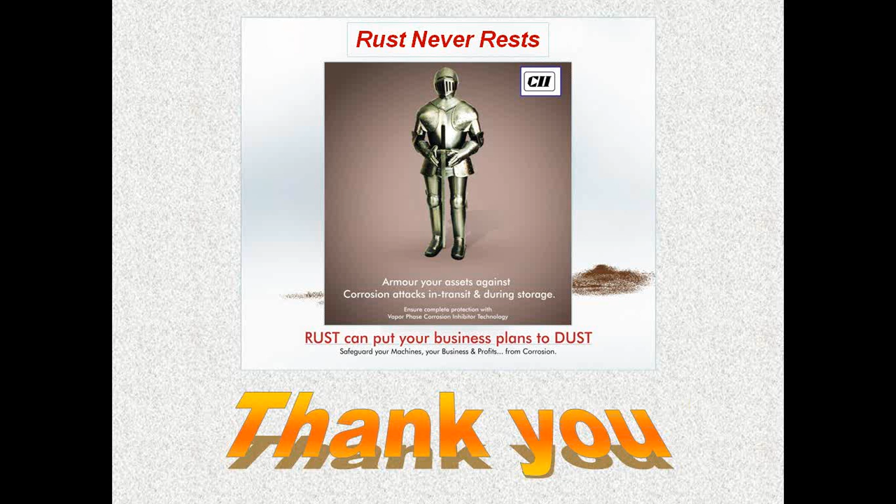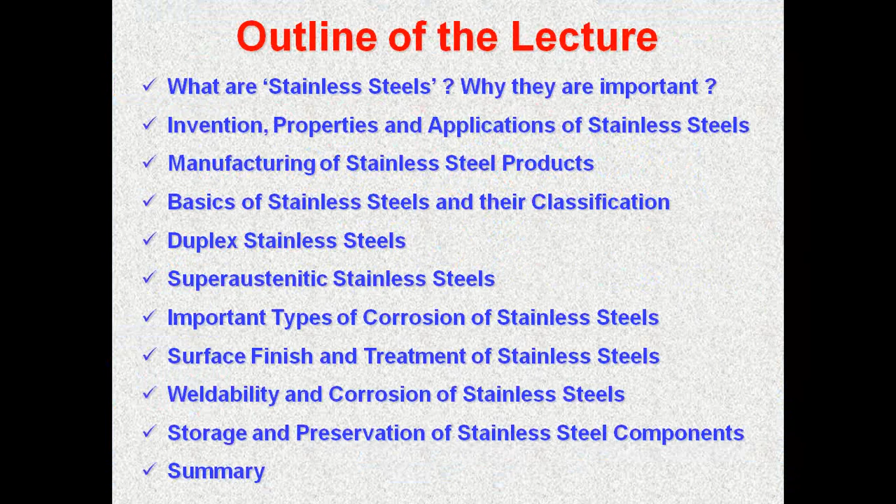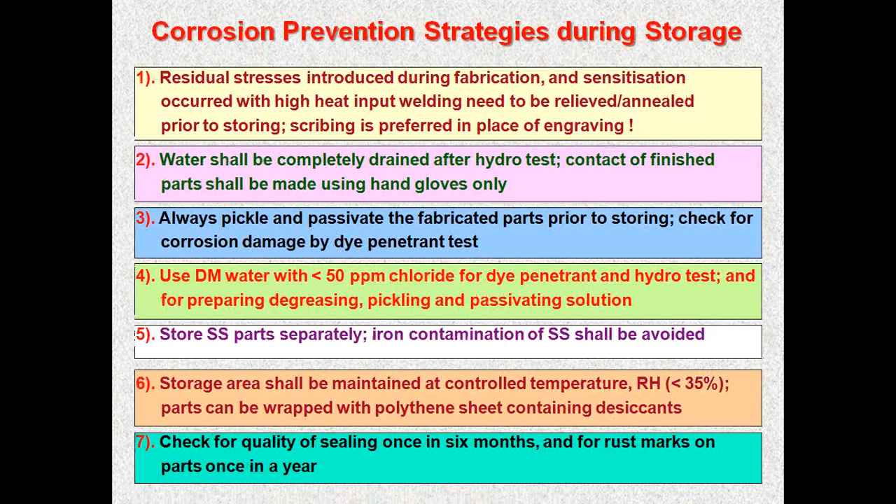And if you have any stain formed during pickling, that means your pickling chemical composition is very strong or it is not properly made. You have to be careful in choosing that. That is one important point.

I will recommend that please don't end with this lecture. Go to all these internet searches. All of you will have a laptop with internet connection. You can put your questions there also. You will find a much simpler version of the information whatever I have given in this lecture, which will be useful to you. There are some videos available. You can get educated more, and please improve your knowledge, because never think that stainless steel is a divine material and you can do anything with that. It is a myth that stainless steel will not corrode. It will also corrode, it will undergo a lot of problems. I know all of you practical people are facing this, that's why you are attending to know more knowledge on this. Thank you very much for joining with me. Thanks to CII. Thank you.